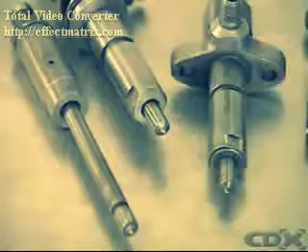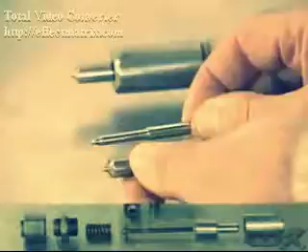Most diesel fuel injectors use the same basic design, made from heat-treated alloy steel. The actual shape will vary according to the application. The injector assembly has several main parts. The nozzle assembly is made up of a needle and body. A pressure spring and spindle hold the needle on the seat in the nozzle body.

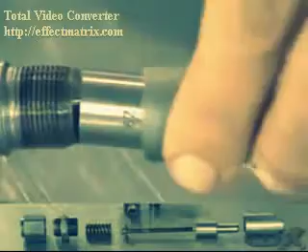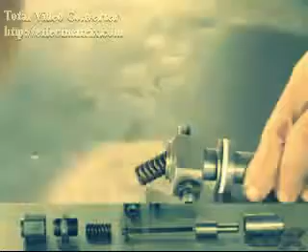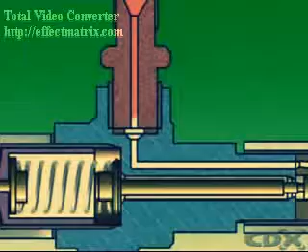A nozzle holder, sometimes called the injector body, may allow for mounting the injector on the engine and some method of adjusting the spring force applied to the needle valve. A cover keeps out dirt and water. The injection pump delivers fuel to the injector. The fuel passes through a drilling in the nozzle body to a chamber above where the needle valve seats in the nozzle assembly.

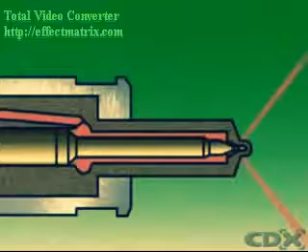As fuel pressure in the injector gallery rises, it acts on the tapered shoulder of the needle valve, increasing the pressure until it overcomes the force from the spring and lifts the needle valve from its seat. The highly pressurized fuel enters the engine at a high velocity in an atomized spray. As soon as delivery from the pump stops, pressure under the needle tapered shoulder drops, and the spring force pushes the needle down on the seat, cutting off the fuel supply to the engine.

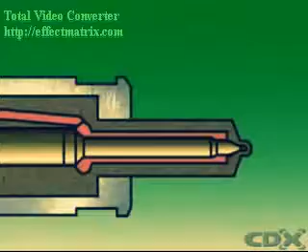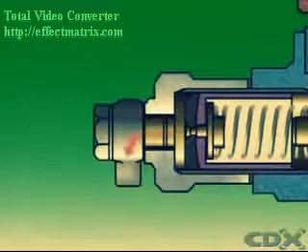Some of the fuel is allowed to leak between the nozzle needle and the body to cool and lubricate the injector. This fuel is collected by the leak-off line and returned to the fuel tank for later use. There are two main types of injector nozzle, hole and pintle.

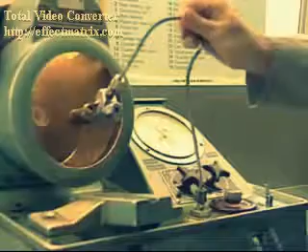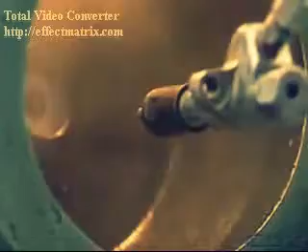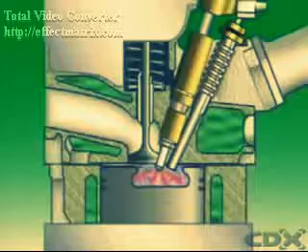Hole-type nozzles are commonly used in direct injection engines. They can be single-hole or multi-hole, and they operate at very high pressures, up to 200 atmospheres. They give a hard spray which is necessary to penetrate the highly compressed air. The fuel has a high velocity and good atomization, which is desirable in open combustion chamber engines.

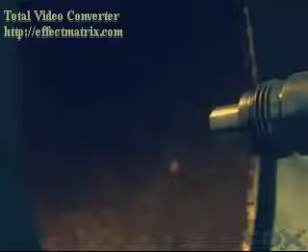In pintle-type nozzles, a pin, or pintle, protrudes through a spray hole. The shape of the pintle determines the shape of the spray and the atomization of the spray pattern. Pintle nozzles open at lower pressures than hole-type nozzles. They're used in indirect injection engines, where the fuel has a comparatively short distance to travel and the air is not as compressed as in the main chamber.